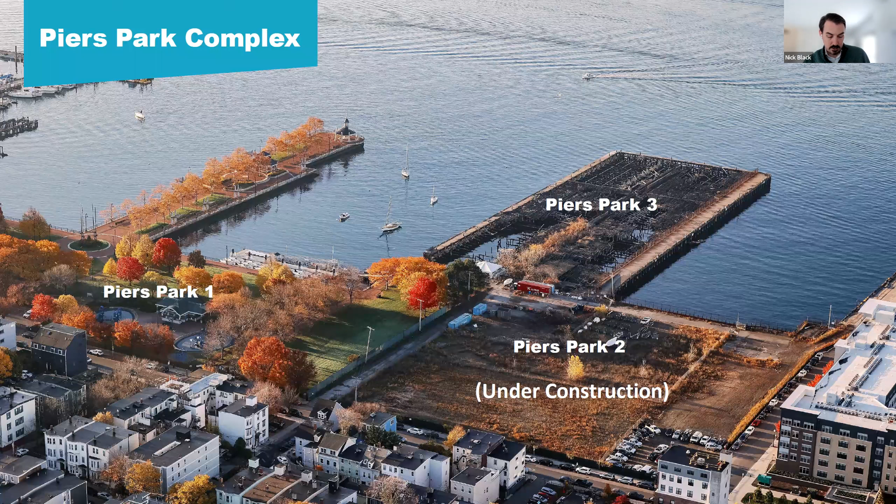In 2020, the trustees were designated by Massport as a nonprofit partner to design, construct, and manage Piers Park 3, adjacent to the current Piers Park, as well as the future Piers Park 2 site, which is now under construction. Since our designation in 2020, we have increased community outreach and engagement to gather feedback on the Piers Park 3 design and future programming opportunities.

This past year, we've spent much of our time focused on connecting with the community in East Boston and all across the city. Our goal has always been to enhance the design and programming of Piers Park by offering fun, free activities that attract diverse audiences and provide a platform for new experiences.

Much of our engagement and programming was supported this summer by our 4th cohort of Waterfront Ambassadors. This included 10 local teens from East Boston, Chelsea, Roslindale, and South Boston, who were employed in the 7-week Waterfront Ambassadors program, where they conducted community outreach about Piers Park 3, helped with programs like Family Festival, taught a morning lesson at the Piers Park Sailing Center, and helped out at the Eastie Farm, and much, much more.

The Waterfront Ambassadors helped us with community outreach throughout the duration of the program, including a weekly farmers market in East Boston, as pictured here.

They helped community members fill out community surveys and mock up designs for Piers Park 3, share their feedback, and talk about the waterfront. Our ambassadors also held their own youth walking tour, where they engaged with young people in the community to learn about the Piers Park 3 project.

With outreach and programming combined, our team has engaged over 4,500 people in 2022 alone around the Piers Park 3 project.

We held monthly Sabores de Nuestra cultural family festivals in collaboration with the Piers Park Sailing Center and the Veronica Robles Cultural Center once again this past summer.

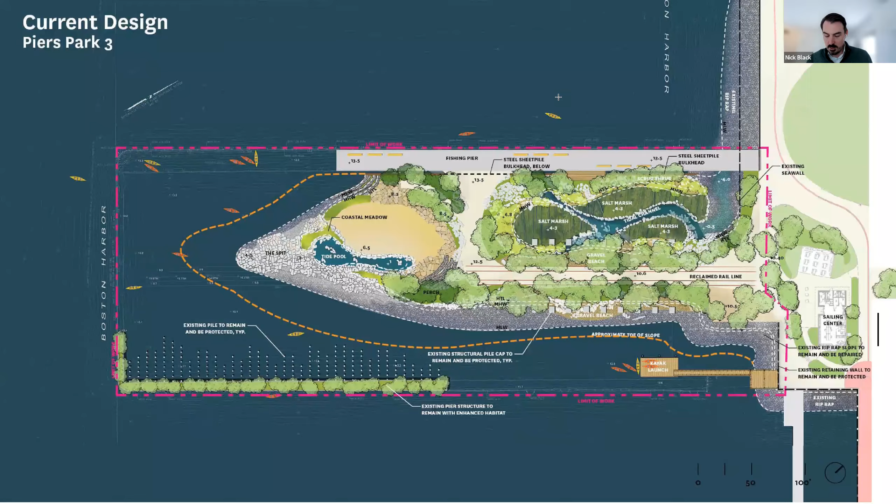As we started to work on this updated design, a few issues became apparent with the original design that we had put forth in the spring of last year. First and foremost, the footprint of that project was going to be much larger and have a much greater environmental impact on the site itself.

That was due to the type of marine engineering that was being utilized to create the landscape within the footprint of the pier. So we went back to the drawing board and made changes to that design, looking to minimize the environmental impact while making sure we could design a project within budget, but still provide the community access to the water, the natural landscapes, and gathering places within the park that was so important from the feedback we heard from the community all along.

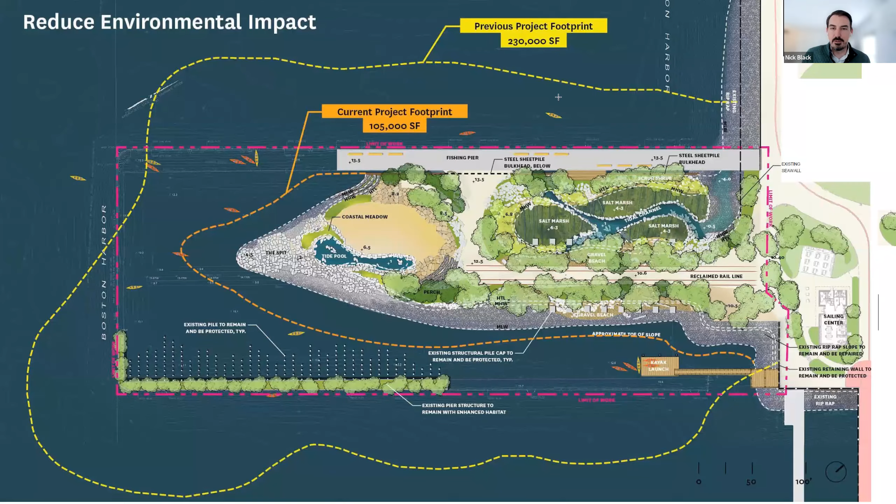The way we went about doing that is to leverage some of the existing conditions on the site itself. For example, the half circle in the middle outlines an existing spit of land that was built as part of the original pier over 100 years ago. There's an existing concrete apron that we think would be a great access point out to the water, but also allows us to do some specialized marine engineering to create more of a landform in place without having to do things harmful to the environment, like extensive dredging and filling of the harbor.

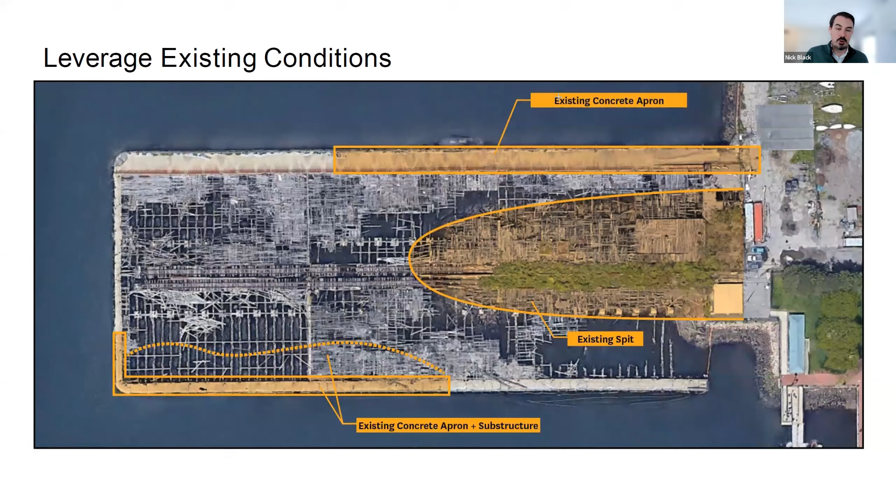The existing concrete apron and substructure also gives us the opportunity to create natural habitat around the pier that isn't necessarily intended for human access, but more for a point of observation. This is where you can see these two theories coming into practice.

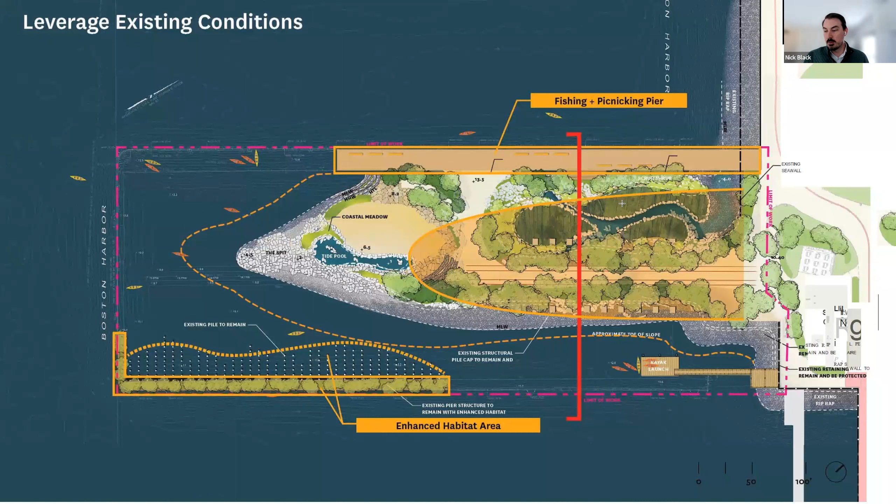The leveraging of the existing landscape creates the overall area of the park with a fishing and picnic pier. There is a coastal meadow and tide pools towards the end, and the salt marsh towards the middle, which create the natural landscape and habitat that we had heard so much interest about throughout the outreach for the project.

All of this comes together utilizing a sheet pile bulkhead wall put into the site along the inside of that pier. That's one of the reasons why in this current design it's important to have the pier as part of the design, because it allows that wall to be concealed behind it, creating a landscape that allows for circulation of people moving in and around the park and right down to the edge of the water.

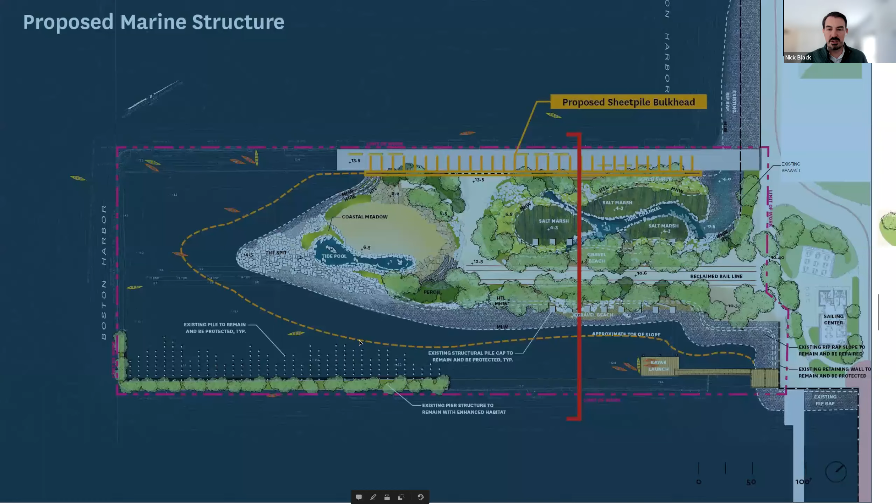This existing pier structure is reimagined as an enhanced habitat area. That's one of the things we're really proud of in this current design, that it still allows for all the different types of educational and ecological activities we had always imagined as part of this project. It still allows us to create immersive ecological environments, letting kids and students get down to the water to conduct research and testing to understand the urban water environment.

The enhanced habitat area also gives us the opportunity to create, utilizing some man-made structures, a more enhanced habitat that allows for an increase in marine life in and around this site, which can be observed from either the land area or even by kayak sailing around it.

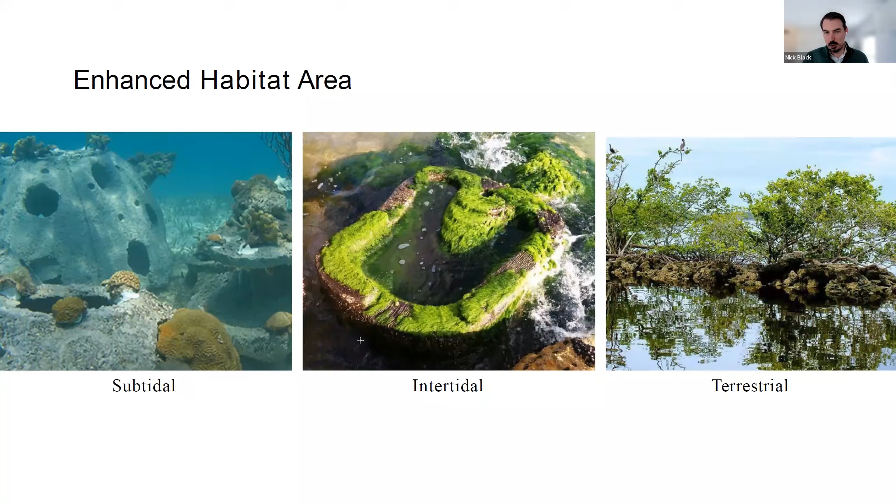A big milestone in this project was reached very recently when we filed our environmental notification form at the end of February. That's the first step in the permitting process for this project. The permitting, as you might imagine, is anticipated to take a good deal of time, and we're excited to have that process underway.

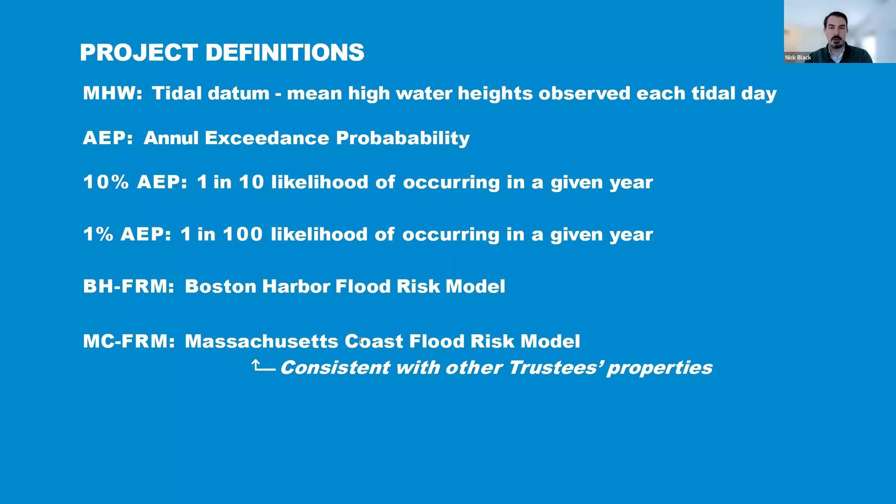Everything from the elevations of the park to how the stone used to create the landscape meets the water. If you're not aware, or if you've heard us talk about this before, we know there is the risk of tidal flooding along Boston's shoreline, particularly with weather events like we had just yesterday with the spring nor'easter. We actually got pretty lucky yesterday because the astronomical tide was not nearly as high as it could be, having to do with where the moon is in the overall tide cycle. So there wasn't extensive flooding yesterday, but there is that potential for the type of flood we've seen in other places like New York City.

One of the things we've really strived to do is understand what the future sea level projections would look like at the park itself. So we've started this process by initially just looking at what the mean high tide benchmark looks like today.

Essentially what this means is that the tide goes up and down in a range of almost 10 feet throughout the day. So this is what that park design would look like at high tide if we built it today. But there's also an understanding amongst our design team and others that there are going to be tidal events or periods of time where that water comes up much higher. As we progress into the future and see the continued increase in sea level rise, those events are going to become more extensive. So we have to prepare for that and what that looks like.

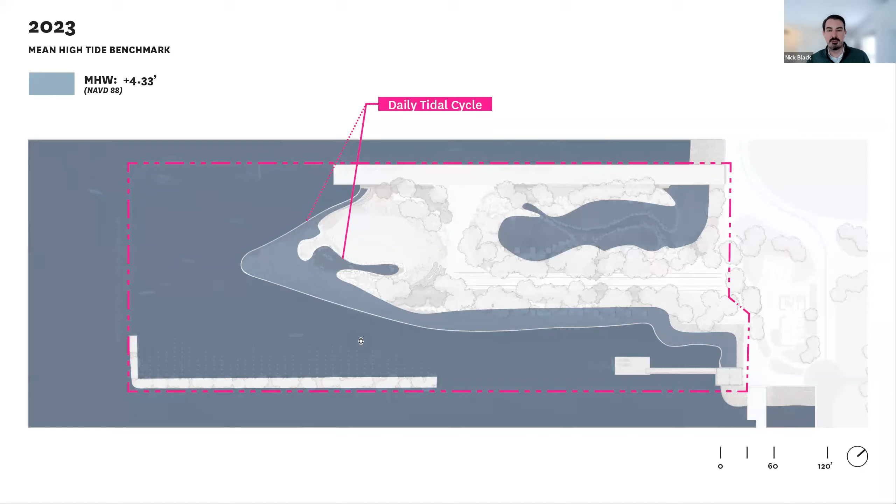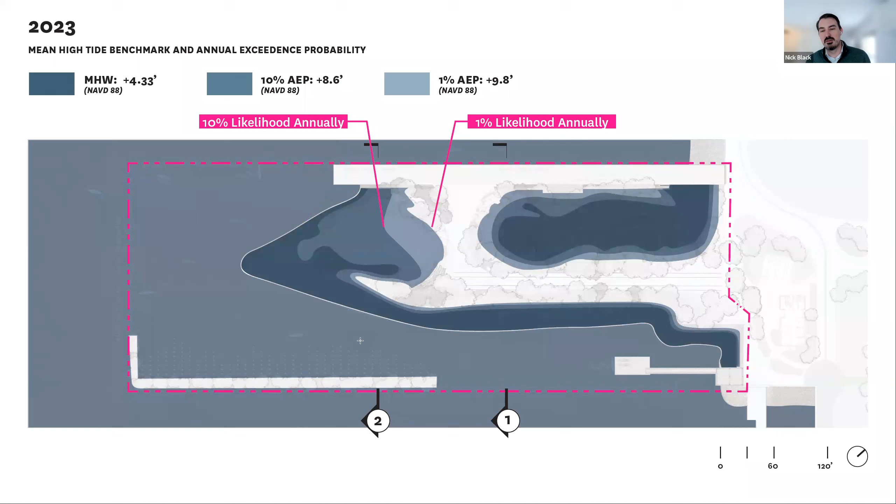For example, this shows the likelihood of a 1 in 10 storm or a 1 in 100 storm in that same time period in 2023. Again, this shows where the water is going to interact much more heavily with the site. So we have to be very thoughtful about the plants we use and the types of materials we use.

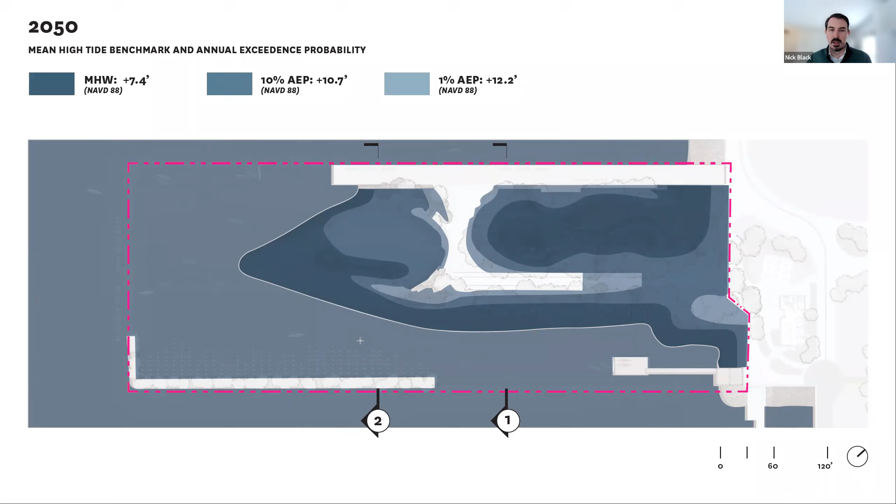As you start to project this out from 2050 and beyond, these flooding periods—again, just temporary events where the tide may only come up for an hour or two at very high tide during a storm—have the possibility or even the probability of completely inundating this site. So we have to be very mindful of not only what that means for the design as it is today, but what it's going to mean for the design in the future. We're trying to work really hard with our design team to anticipate what updating the design might look like in 20 years, 30 years, or 50 years.

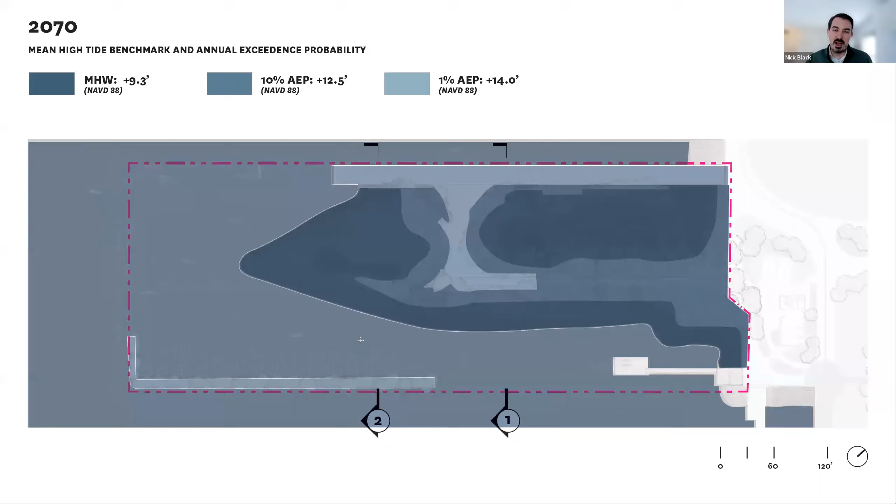Because eventually, once you get to 2070, there's a 1 in 100 chance that there will be a storm that completely subsumes this site for at least a short period of time. Again, this isn't something we anticipate would be a permanent state, but we have to make sure we're thoughtful about the materials we're using and the design we're building to withstand such an inundation. That's certainly something we've seen parks do successfully in other places, and is a big piece of the work we're doing now to understand and make sure that whatever we're building today has the opportunity to exist now and into the future.